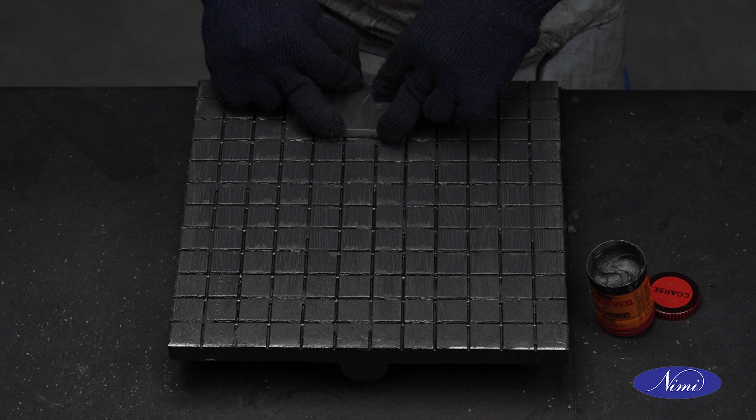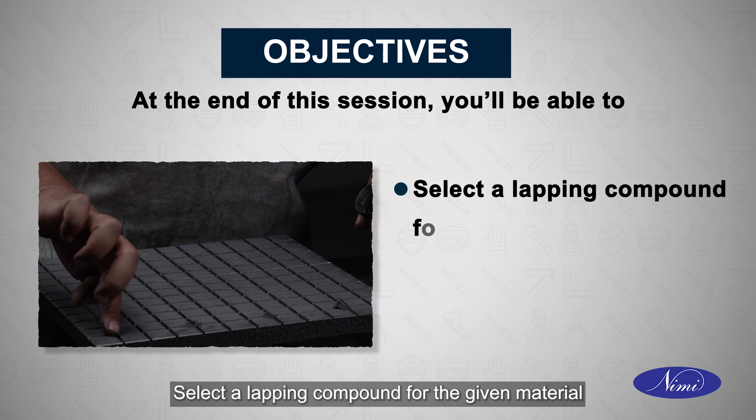Let us look at the objectives of this session. At the end of this session, you will be able to define the lapping process, lap the surface using lapping plate, select a lapping compound for a given material, check the surface quality with surface roughness standard set.

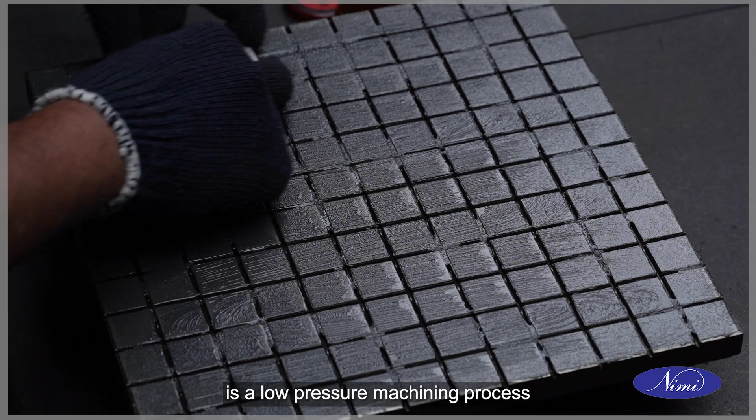Lapping is a low-pressure machining process used to increase the dimensional accuracy and surface finish of the workpiece with the help of a lapping paste, which is abrasive powder suspended in a medium.

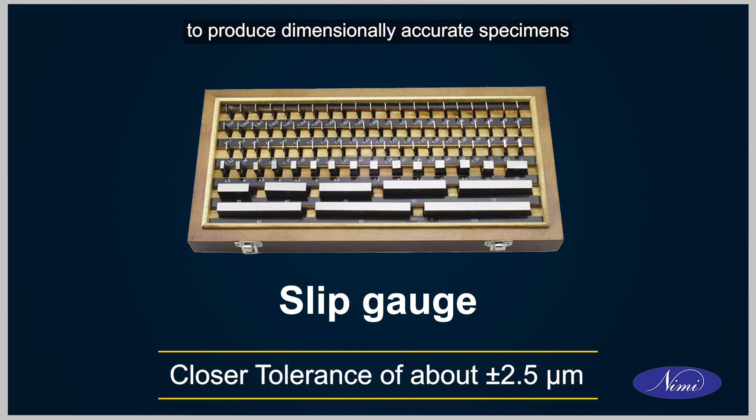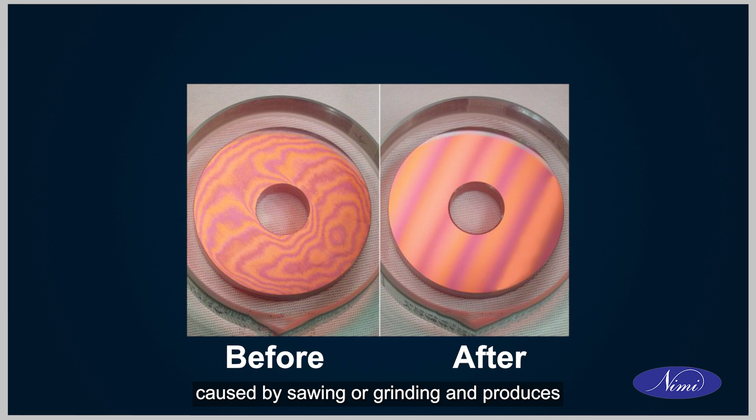Lapping processes are used to produce dimensionally accurate specimens to a closer tolerance of about plus or minus 2.5 micrometer. Lapping removes subsurface damages caused by sawing or grinding and produces the required thickness and flatness.

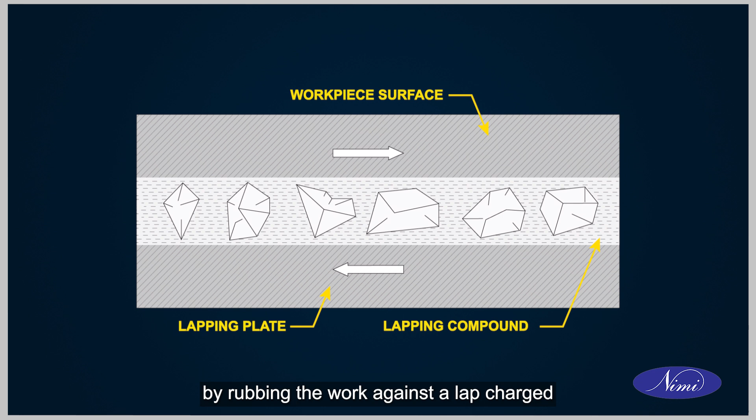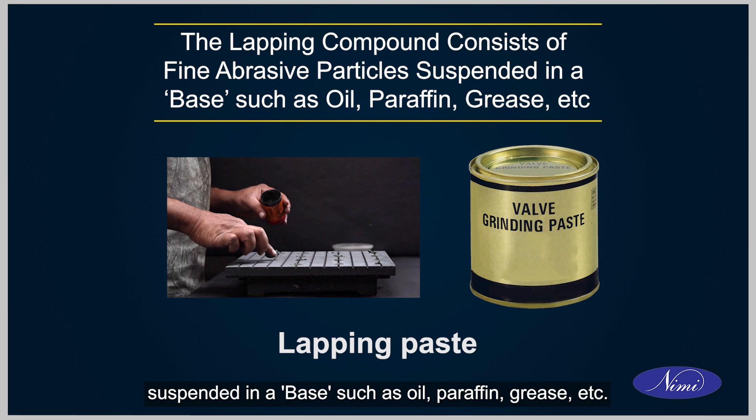In the lapping process, small amounts of material are removed by rubbing the work against a lap charged with a lapping compound. The lapping compound consists of fine abrasive particles suspended in a base such as oil, paraffin, grease, etc.

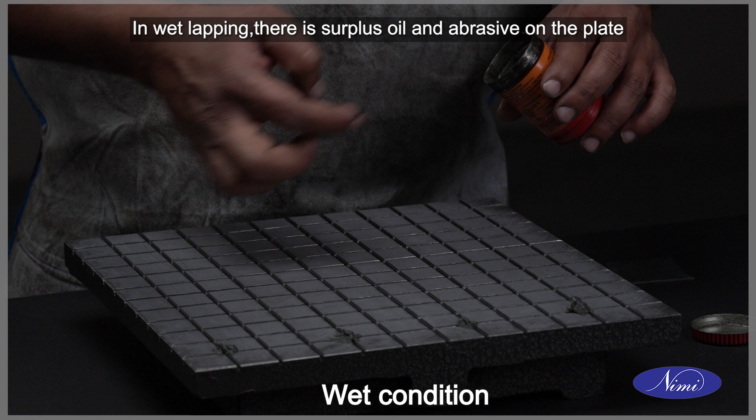Lapping can be carried out manually or by machine. Lapping can be carried out either in wet or dry condition. In wet lapping, there is surplus oil and abrasive on the plate. In dry lapping, the lap is charged only by rubbing the abrasive on the surface.

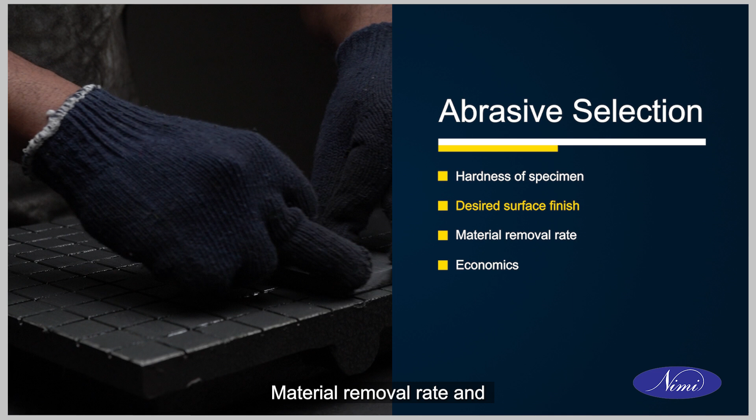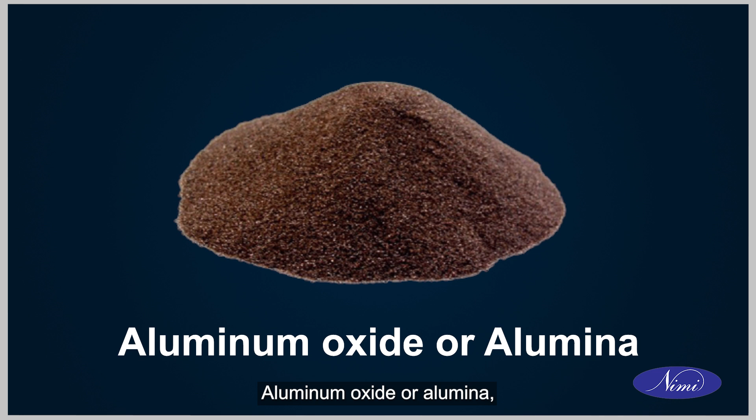The abrasive selection is based on the hardness of the specimen, desired surface finish, material removal rate, and economics. There are 4 basic types of abrasives used in lapping: silicon carbide, aluminum oxide or alumina, boron carbide, and diamond.

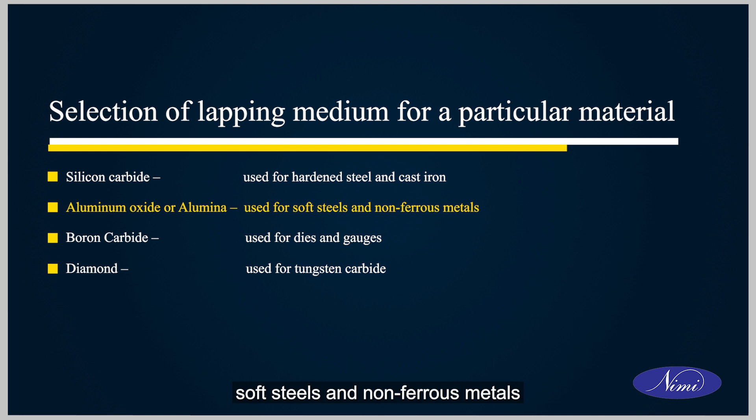Now, let us learn about the selection of a lapping medium for a particular material. Silicon carbide is used for hardened steel and cast iron. Aluminum oxide or alumina is used for soft steels and non-ferrous metals. Boron carbide is used for dies and gauges. Diamond is used for tungsten carbide.

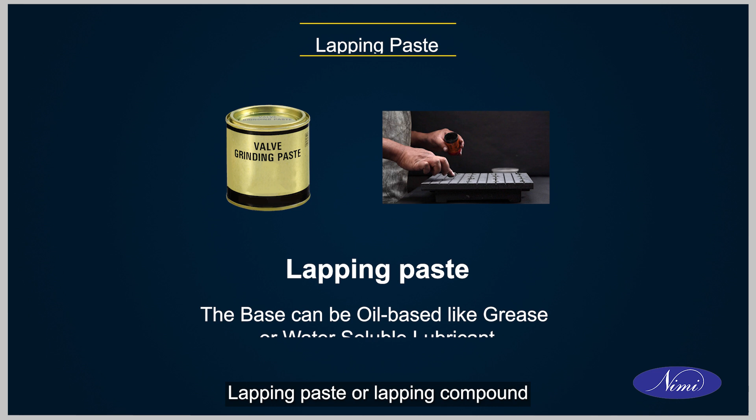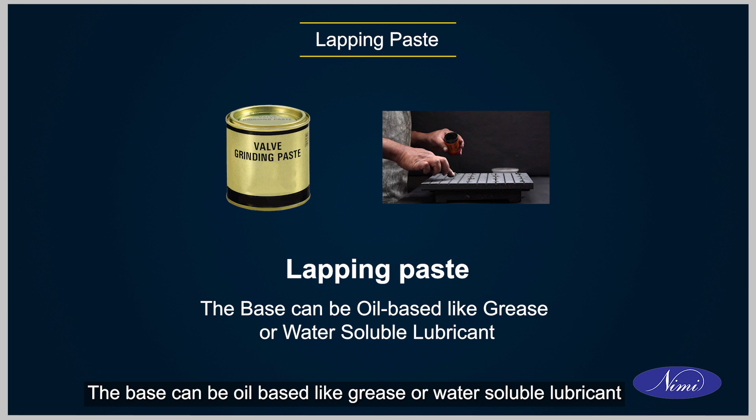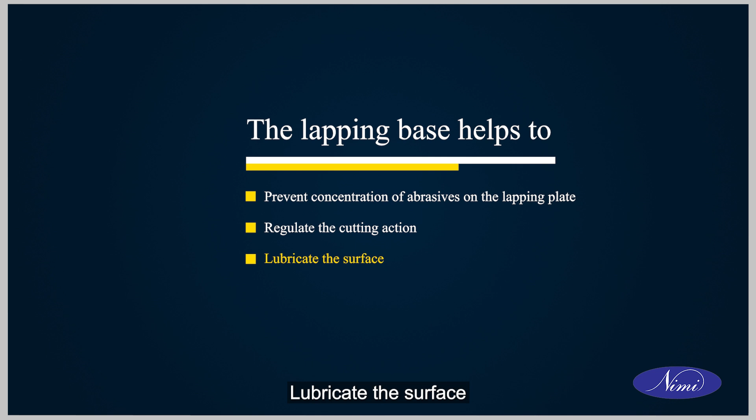Lapping paste or lapping compound is a mixture of hard abrasive particles, also known as the lapping medium, in a suitable base. The base can be oil-based like grease or water-soluble lubricant. The lapping base helps to prevent concentration of abrasives on the lapping plate, regulate the cutting action, and lubricate the surface. The commonly used bases are water-soluble cutting oil, vegetable oil, machine oils, and petroleum jelly or grease.

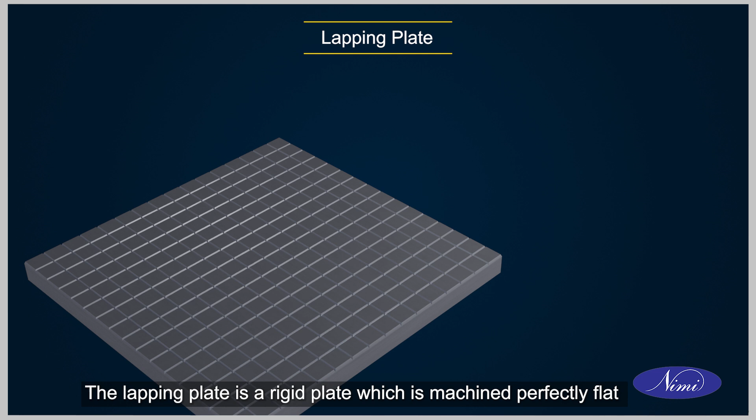Let us learn about lapping plate and lapping process. The lapping plate is a rigid plate which is machined perfectly flat with grooves cut on it.

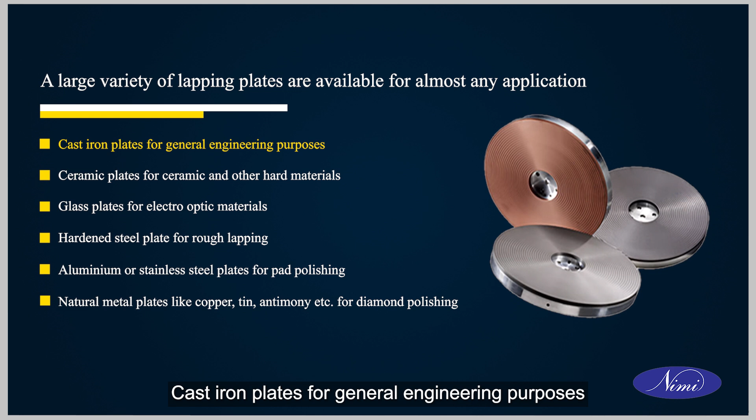A large variety of lapping plates are available for almost any application: cast iron plates for general engineering purposes, ceramic plates for ceramic and other hard materials, glass plates for electro-optic materials, hardened steel plate for rough lapping, aluminum or stainless steel plates for pad polishing, and natural metal plates like copper, tin, antimony, etc. for diamond polishing.

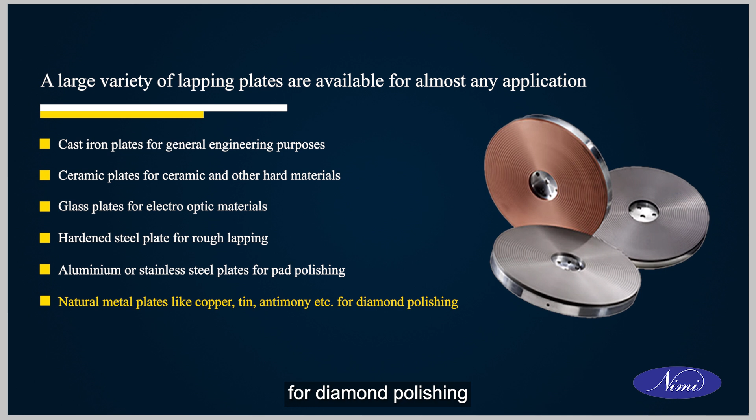Grooved lapping plates are best for flat surfaces with large areas. Lapping plates without grooves are preferred for cylindrical lapping.

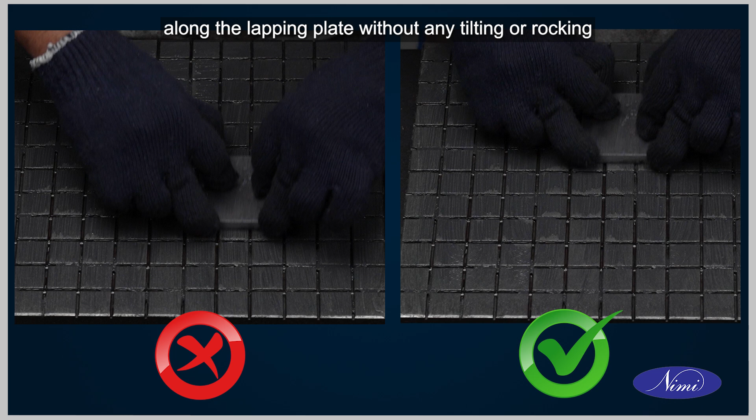This lapping plate should be kept flat without any rocking on the workbench. The method of holding the workpiece should be such that it moves along the lapping plate without any tilting or rocking. Smear the lapping medium on the plate and charge the surface of the lap plate. Apply downward pressure with fingertips while moving the work.

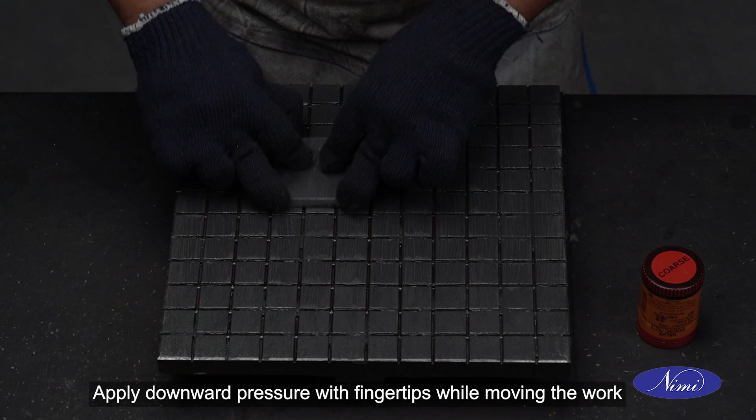Let us learn about the precautions while lapping. Use the entire surface of the lapping plate while lapping to avoid wearing of the plate in different smaller areas. Do not dwell in one place while lapping.

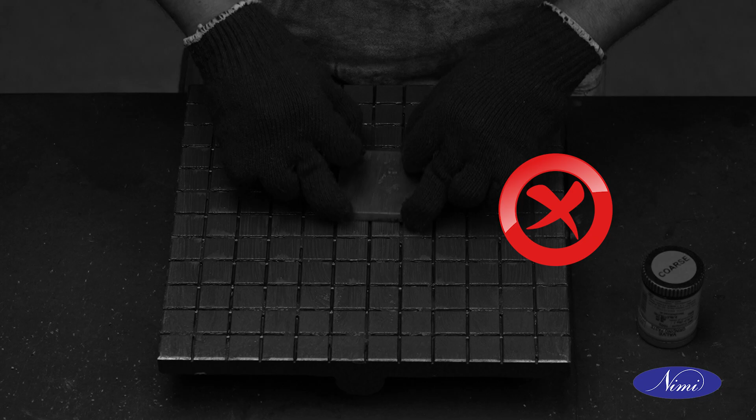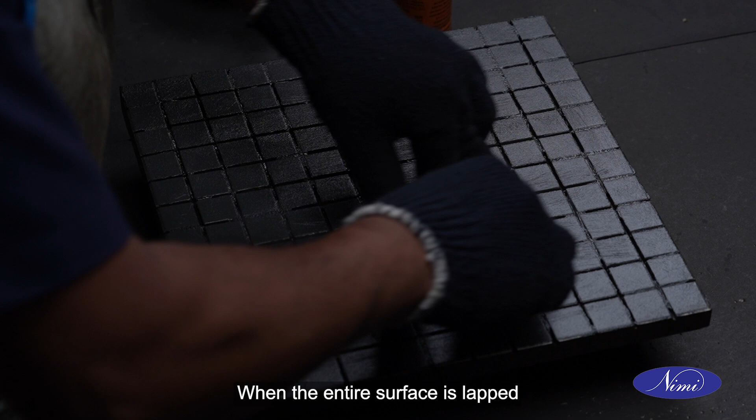The lapped surface can be identified by the dull surface. Lapping should be continued until the entire surface being lapped has a dull appearance. When the entire surface is lapped, clean the surface with kerosene and inspect the workpiece.

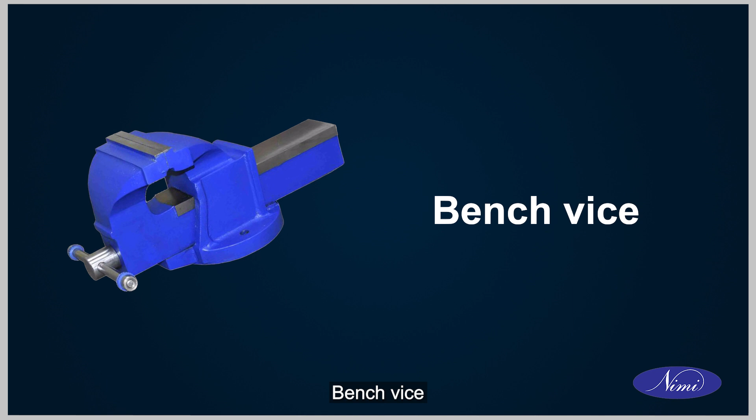Let us learn the procedure for lapping. The tools required for the lapping process are steel rule, tri-square, vernier caliper, hacksaw frame with blade, different grades of files, dot punch, scriber, marking media, ball peen hammer, bench vice, lapping plate, and lapping compound.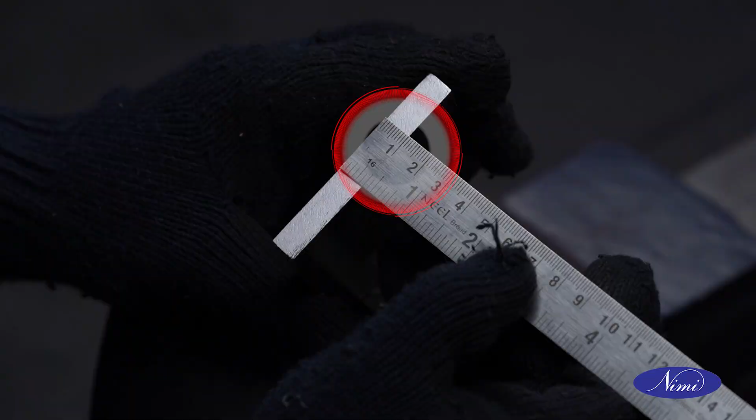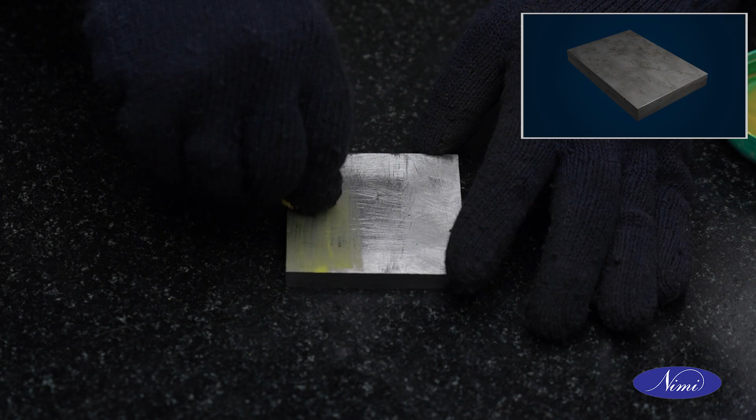Let us prepare the workpiece for lapping. Check the raw material for its size using a steel rule. File all the 6 faces using a bastard file. Ensure parallelism and perpendicularity using a tri-square. Apply marking media on face A.

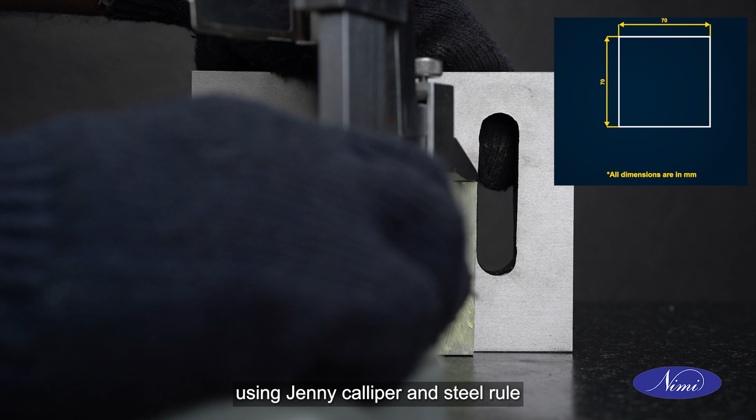Mark to size as per the drawing using jenny calliper and steel rule. Witness mark the lines using dot punch and ball peen hammer. Hacksaw the excess material if the available raw material is 3 mm larger than the required size.

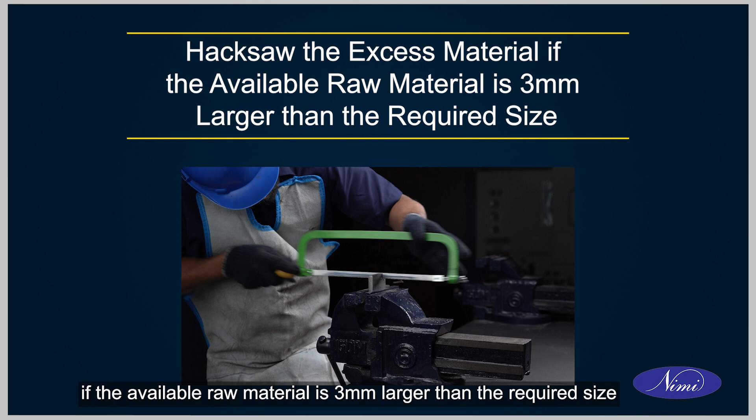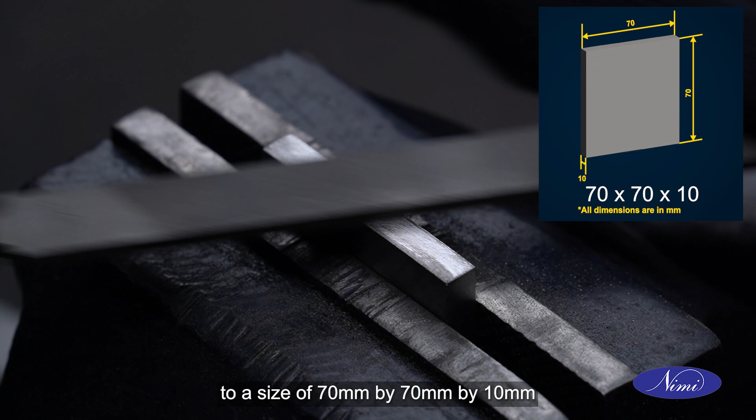Rough file using bastard file and finish using smooth file to a size of 70 mm by 70 mm by 10 mm. Ensure parallelism and perpendicularity using a tri-square.

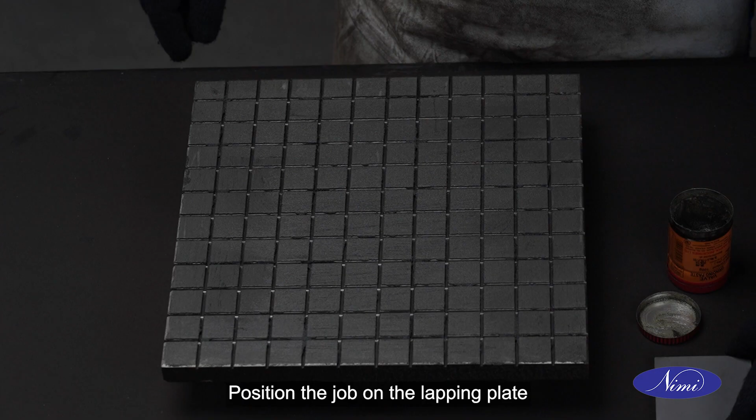Let us now move on to the lapping procedure. Place the lapping plate on a firm surface such that the lapping plate does not shake. Position the job on the lapping plate. Apply lapping medium on the surface of the lapping plate. Hold the job tightly in the hand. Lap the surface that requires finishing.

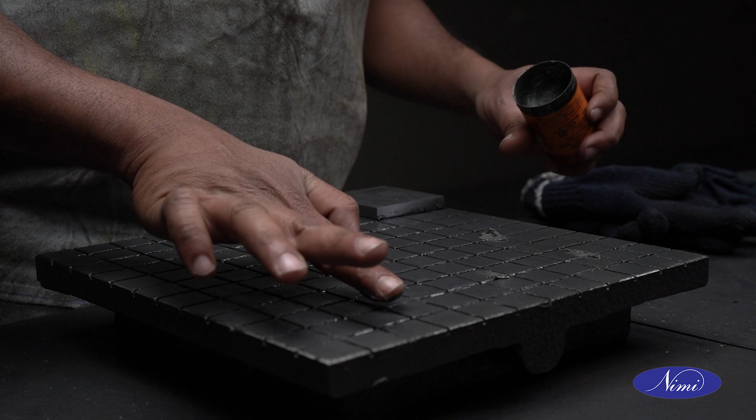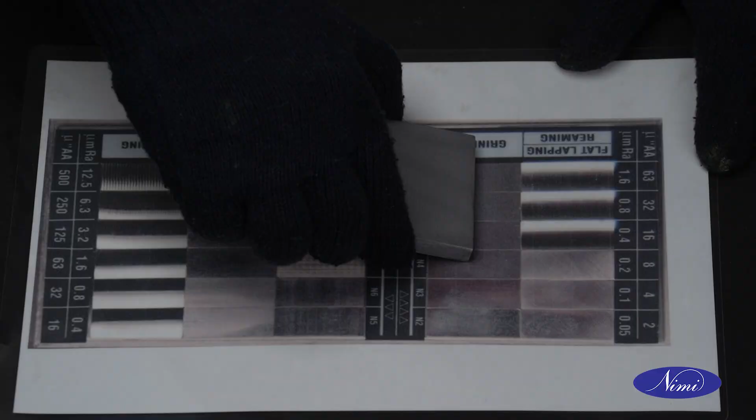Always keep the lapping plate moist. Do not give any excessive pressure. Check the flatness by using tri-square. Follow the lapping process until the required surface finish is achieved. Check the surface roughness using standard set of roughness samples.

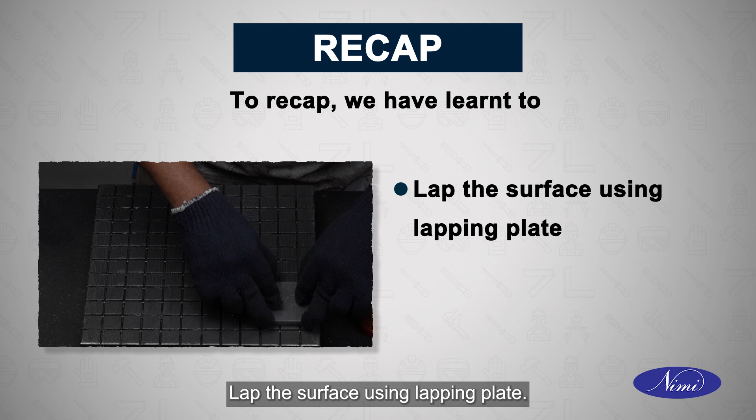To recap, we have learned to define the lapping process, lap the surface using lapping plate, select a lapping compound for a given material, and check the surface quality with surface roughness standard set.